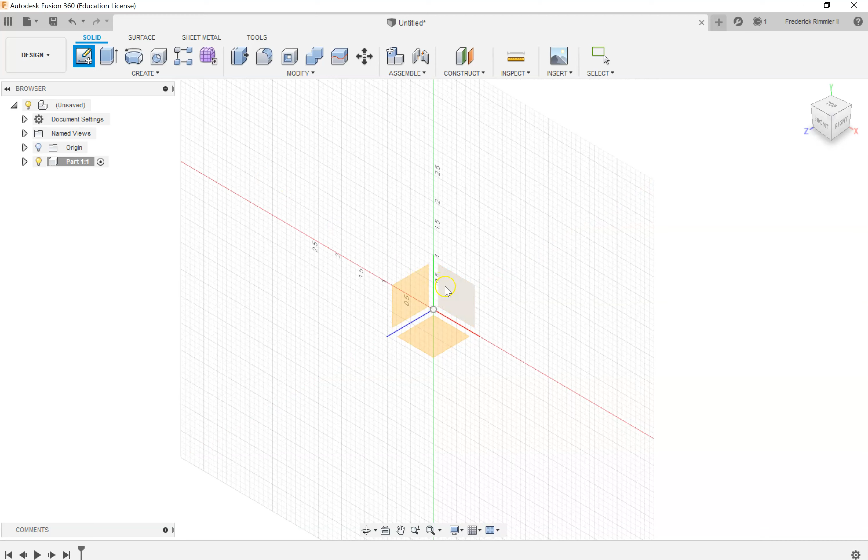Now remember, every 3D model has to start with a two-dimensional sketch. So I'm going to come up here and click Create Sketch and just pick a surface to create the sketch on. It doesn't really matter at this point which one we use.

And so for part 1, we've got a couple different tools to choose from: line, rectangle, circle. I'm going to go ahead and go with line and just quickly draw out this shape. We don't need to be too concerned with size or anything like that at this point.

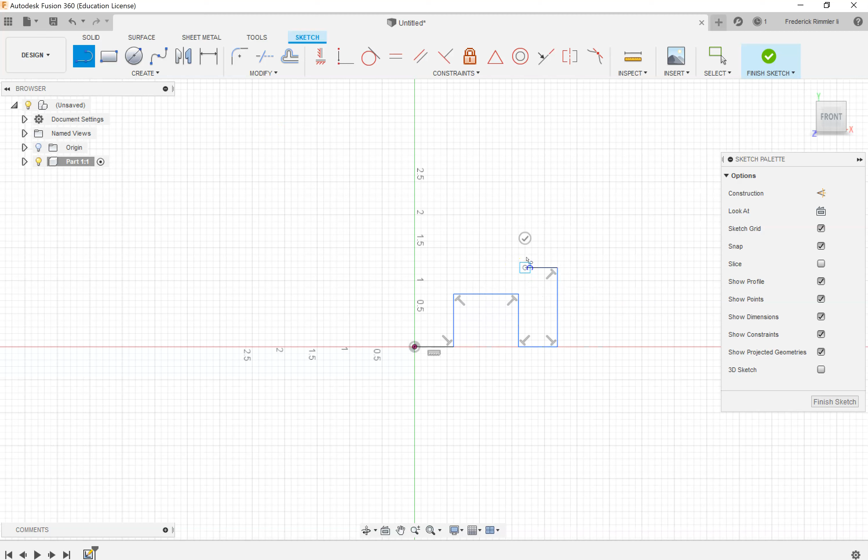I'm going to take a little more time than I did yesterday in class and get some nice straight right angles. Oh, looks like I missed there just at the end. So I'm going to come up here to my perpendicular constraint and go ahead, click two lines to make that a nice even right angle.

Another important thing you want to do is always start at the origin when you make a new sketch for the first time. Because remember, everything needs both size and location. If you start at the origin right here in the middle, that will lock your location in.

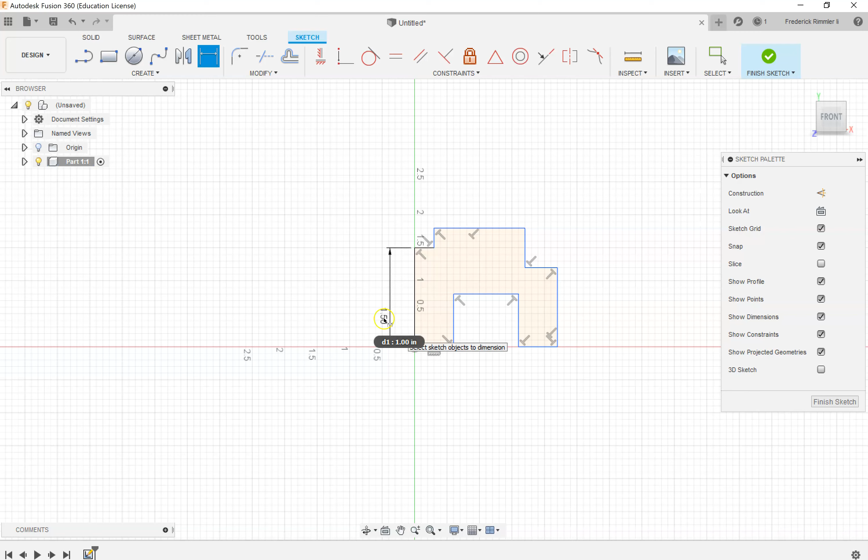So now I'm going to come up here and click Sketch Dimension and add some measurements to this guy. So we know that he's 1.5 inches tall. This guy right here is 1 inch, 0.5. And I'm not going to narrate all of these measurements.

I'm going to go through a little bit quickly because all of these measurements can be found on the worksheet. You're just going to have to pull them off of that isometric sketch.

Now, if I want to dimension across this whole guy, I'll just go ahead and click one corner, click another corner, and then I can bring my mouse down and add my overall width.

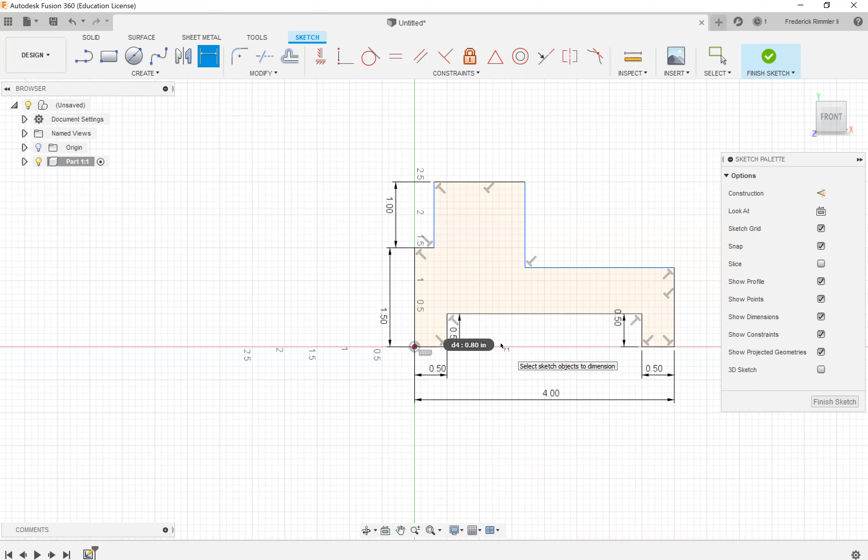You can see it got a little funky there. That's fine. All I'm going to do is keep working on adding those dimensions, and eventually, once we get them all done, it'll go ahead and take shape.

The other thing we want to do is, you can see we've still got some blue lines here. Ultimately, by the end, all of those blue lines will turn black, like you see here. That means this part is now fully constrained.

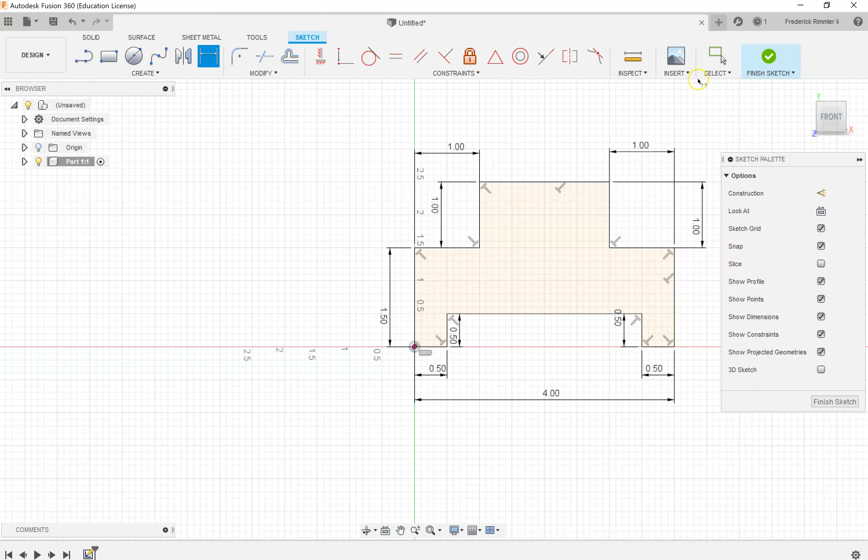I can go ahead and click Finish Sketch up top, and it's time to make him 3D. We've got two options. We can either click Extrude and type in our size, or we can go ahead and

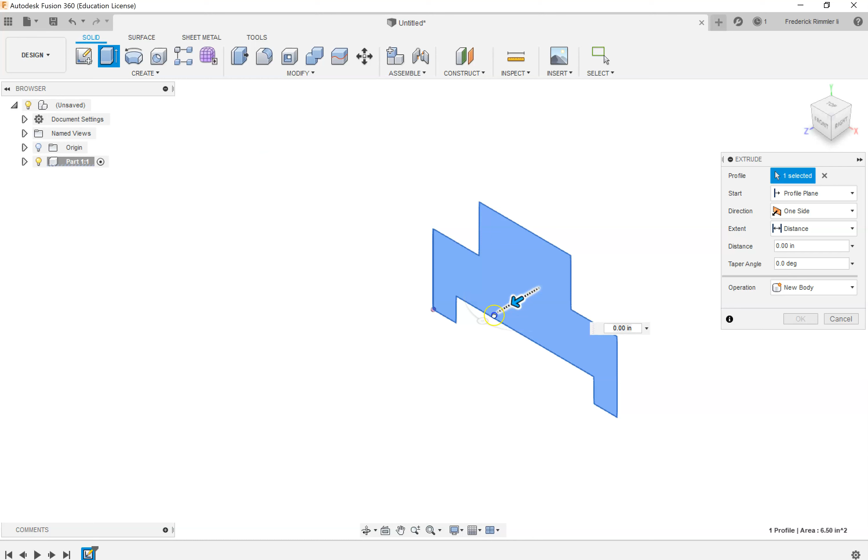use the Press Pull tool under Modify, click our shape, and drag him into 3 dimensions. Now I'm going to go ahead and add the depth of this guy.

Next up, we need to add a little shelf right here on the side. So I'm going to click Create Sketch and click this side.

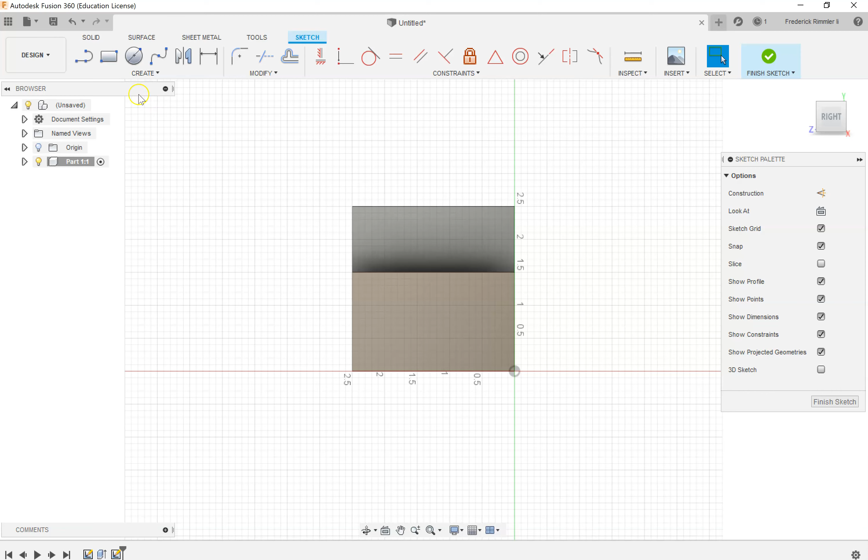Let's see, looking at that shelf, he's a rectangle that is 0.25 inches tall, 1.5 inches wide. So I'm going to go ahead, draw a quick little rectangle and make him 0.25 by 1.5 inches. You can see he's still blue, and that's because every feature has to have both size and location.

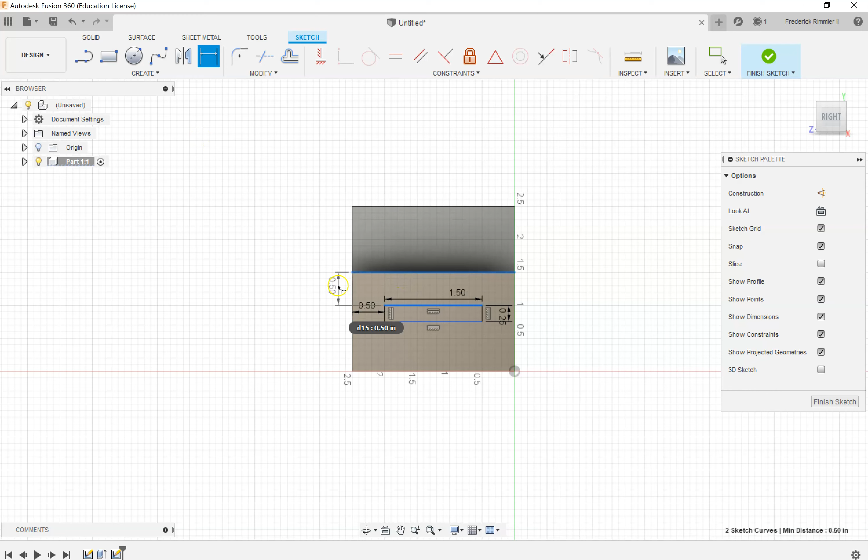We've got our size added, but we don't have our location indicated. Looking at that isometric sketch, I can see that the distance from the shelf to the front is 0.5 inches, and the distance from the shelf to this edge, that looks like it's going to be 0.75 inches.

Our sketch turned black. That means he's fully constrained. We're good to go ahead and finish the sketch. And again, I'm going to use the press pull tool.

Click there and drag him out. It looks like 0.75 inches. And that's it, part 1 is done. I'm going to go ahead up here and save it as practice part 1.

Now your worksheet also says in your notebook to record the following information: surface area, mass, volume, and center of mass. If you come over here to your browser and right-click on the component, you can come down to Properties, and then all of that information is right here. We can see our surface area, mass, volume, and down here our center of mass in the X, Y, and Z direction. So you'll want to go ahead and record that information in your notebook.

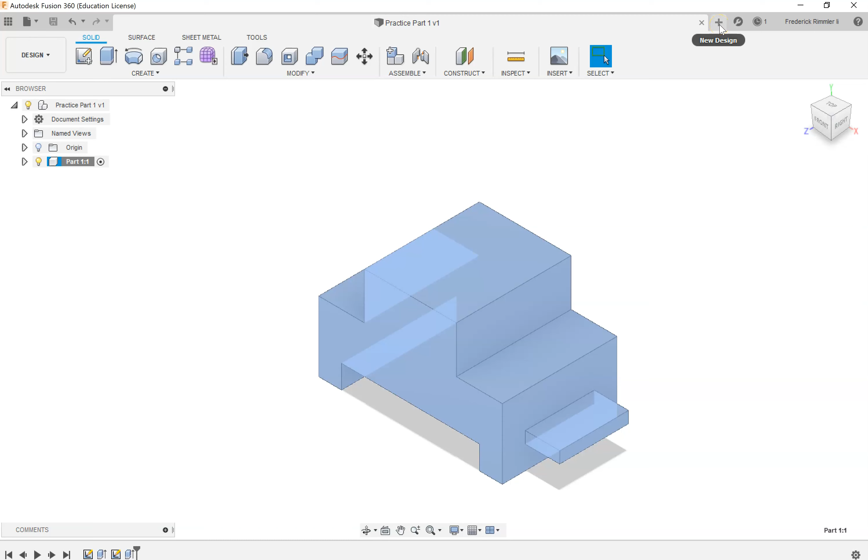On to part 2. To make a new part, I'm just going to come up here and click the plus for a new design. If my screen looks a little different than yours, that's because I'm working on my laptop and I've customized some of the settings.

Now, looking at part 2, there's a very important note down in the bottom where it says all dimensions are in millimeters, so we're working with a metric part. I'm going to come here to my browser and go to Document Settings, and where it says Units, I'll click that icon. Then I can come over here on the right side and change inches into millimeters. Click OK, and now we're good to create our component.

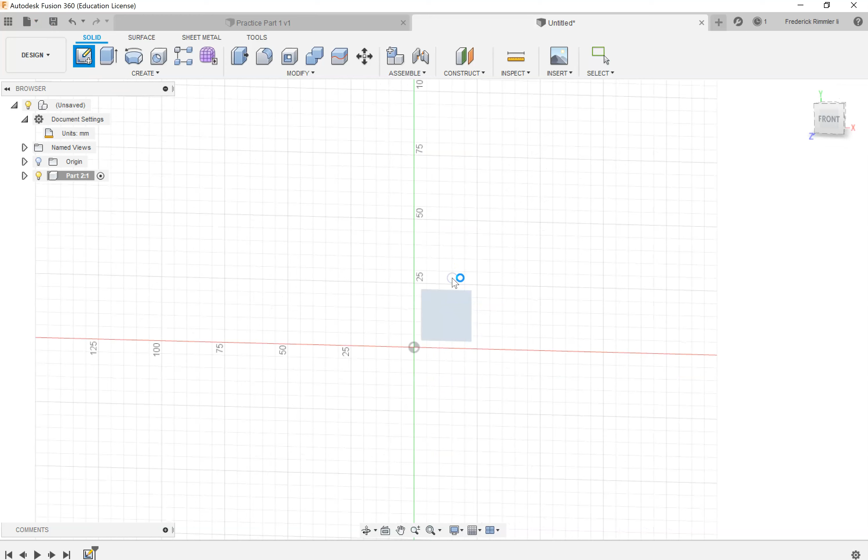Create new component, I'm going to call this guy part 2. And just like before, everything is going to start with a sketch. So I'm going to create a sketch and draw him out. I'm going to use the line tool again, starting in my origin, and just draw out my rough shape nice and quick.

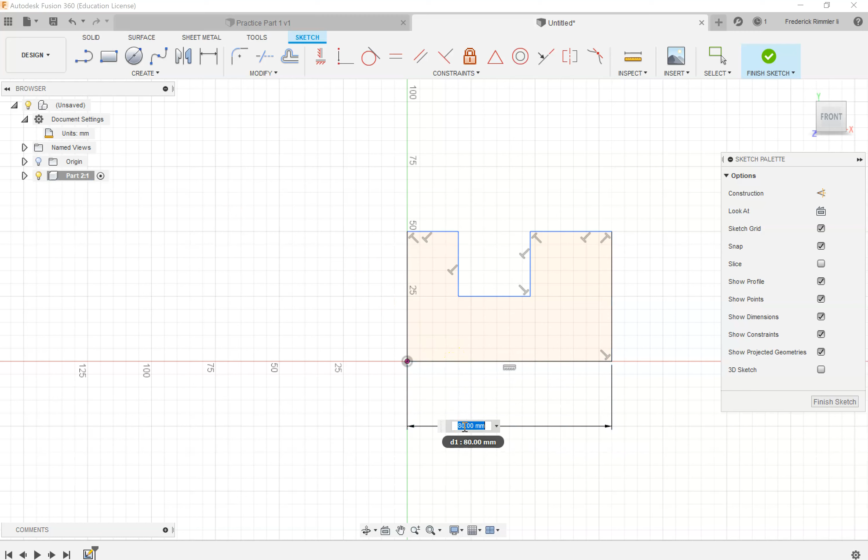Now it's time to set some dimensions. I can see that my overall width is 60 millimeters, and my overall height from top to bottom is 40 millimeters. Then I'm going to go through and fill in these measurements from here. Again, I'm not going to narrate all of these measurements. You're going to want to practice pulling some of these measurements from the isometric sketch on the worksheet.

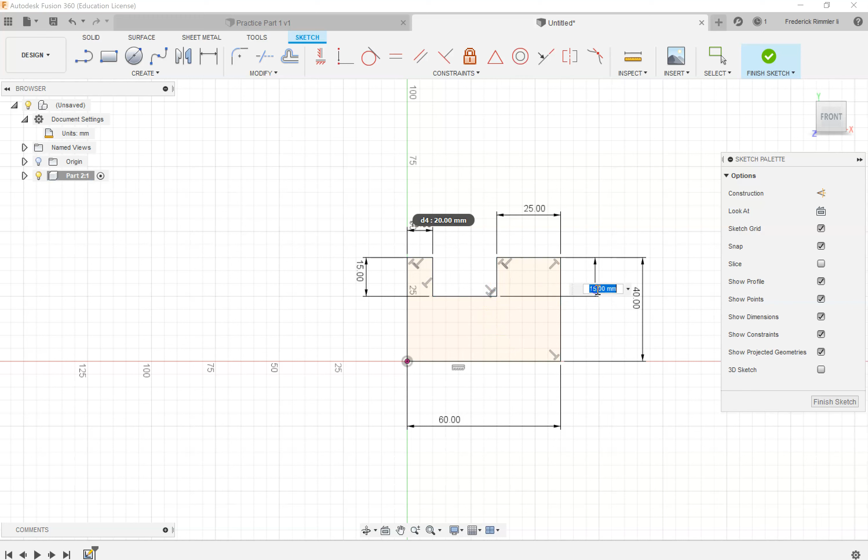Going through, it looks like we are almost fully constrained. And there we go, all of our lines are now black. We are now fully constrained. I can finish the sketch and use the press pull tool to drag him into 3 dimensions. Looks like a depth of 30 millimeters.

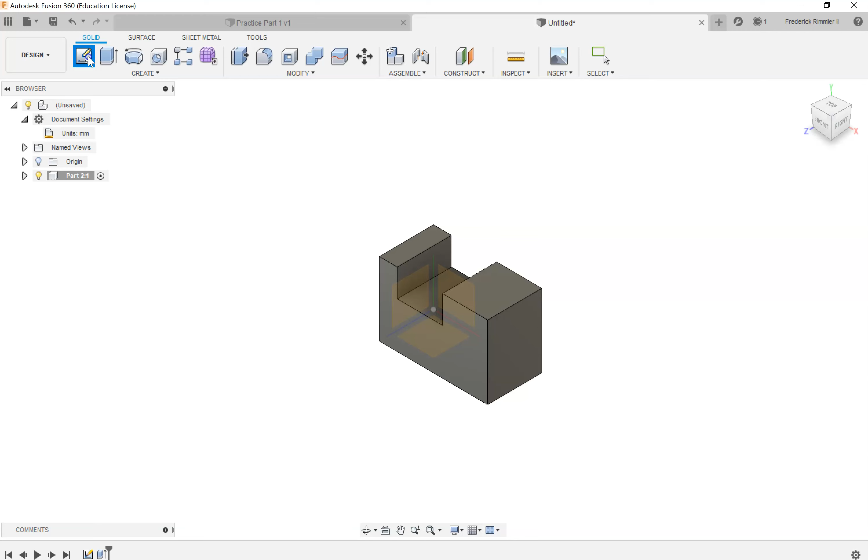Now, this guy, instead of having a shelf on the side, he's got a hole running through, but we actually make it the exact same way. I'm going to come up top to Create Sketch, click on that side where I want to put the hole, and use the rectangle tool to draw a quick rectangle.

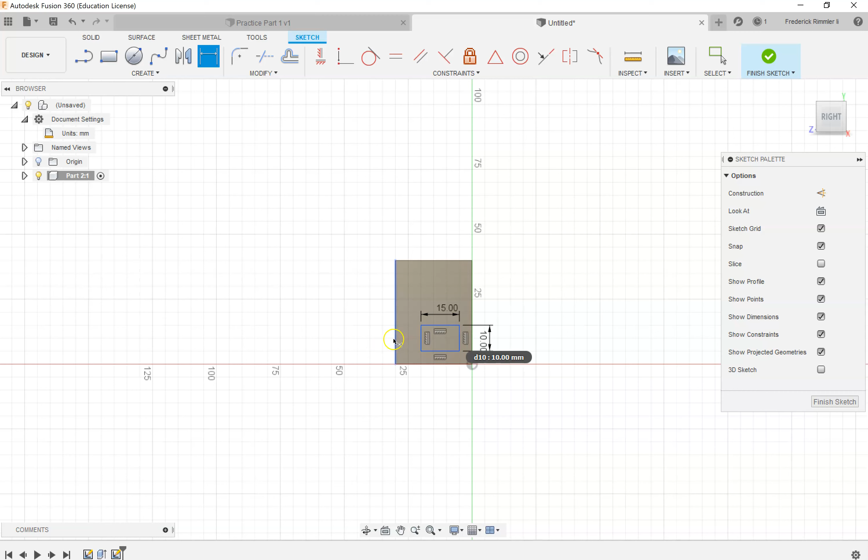My dimensions for this guy, he looks like he's 15 millimeters wide, 10 millimeters tall, and he's still blue because I still need to give him a location. So looking on our sketch, from the front of the part to the edge of the hole is 3 millimeters, and from the bottom of the part to the bottom of the hole, looks like he's 5 millimeters.

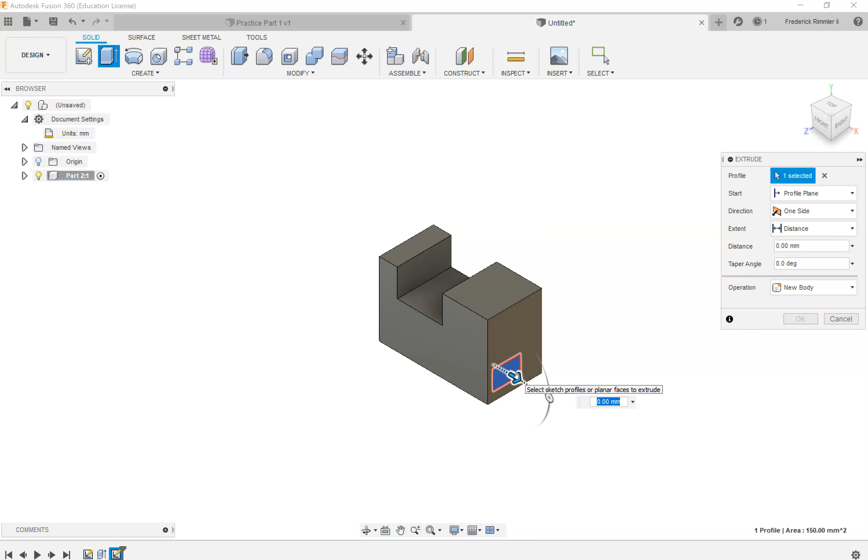All of our lines are black, we're fully constrained. I'm good to finish sketch and use my press pull tool. Now I'll click on that rectangle, and last time we dragged him forward. This time I'm going to drag him backwards into the part. You can see our distance is now negative, and the part lights up red, indicating that it's going to be cutting a hole out of the material.

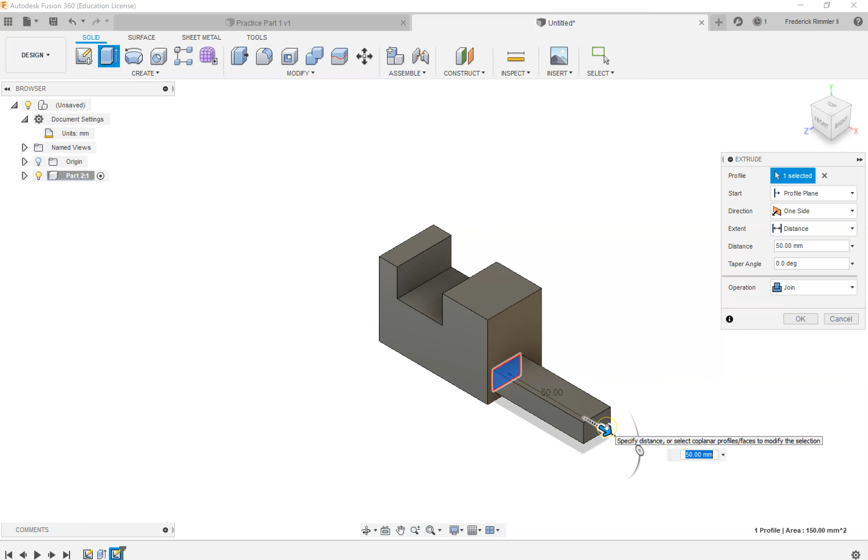We can also, on this right side, see Operation Cut. When I'm pulling him forward, the operation is listed as join. Those are the two basic types of operations that we do. Join means we're adding material, cut means we are removing material. There's a couple other tricky ones that we'll get to down the road, but join and cut are the two basics, and you can really accomplish most things using those.

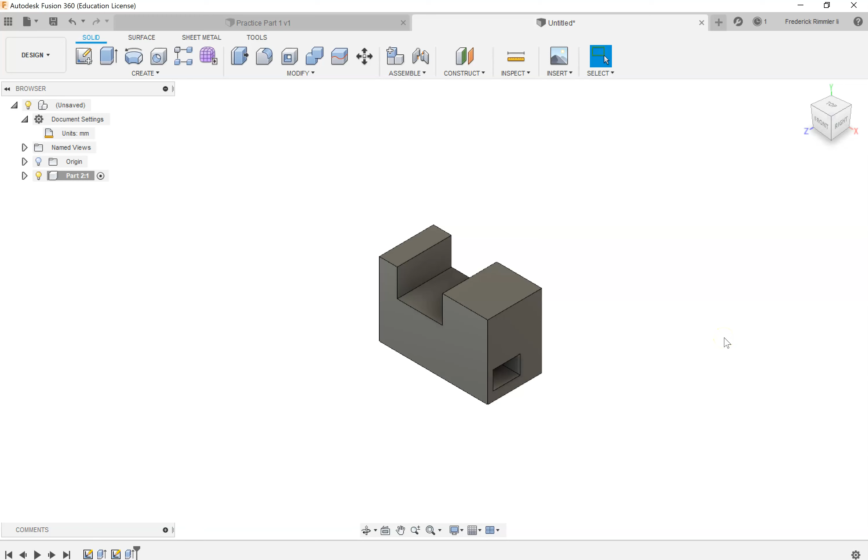And like you can see, our part's now done. I can go over here to the browser, right-click, open my properties, and record my surface area, mass, volume, and center of mass. I'm going to go ahead and save this part as practice part 2.

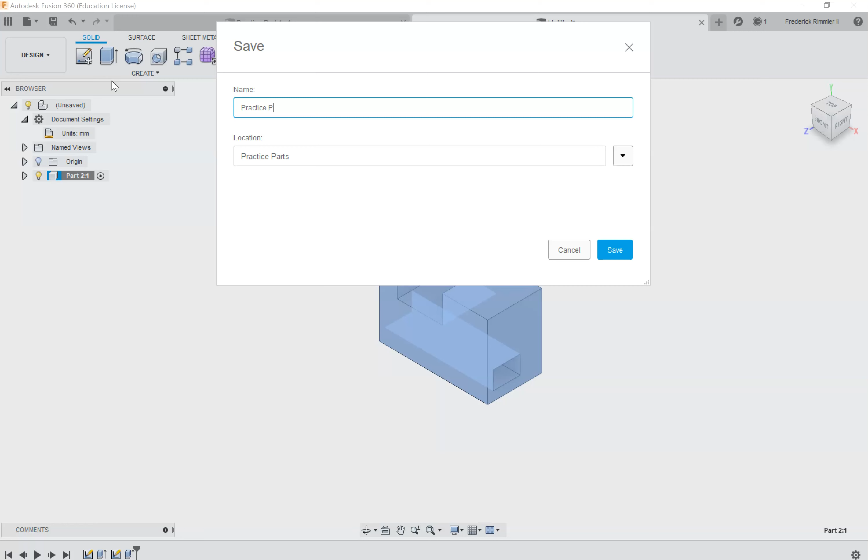Moving on to my third part. But before that, if I open up the data panel where we had that project, we can see all of the parts we're saving into this project, along with the times they were created. A handy feature is we can access different versions.

I can see that practice part 1 was last updated 5 minutes ago by me, and that's when it was created. As we work on more complicated parts and go through version 1, version 2, version 3, sometimes taking a step backwards to look at past versions can be useful if we make changes we don't necessarily like. So I'll close the data panel and move on to part number 3.

Looking at our note on the bottom, it says all dimensions are in inches. I'm going to double check right here in my browser that we are in inches. Create a new component, call this guy part 3, and go ahead and start my sketch.

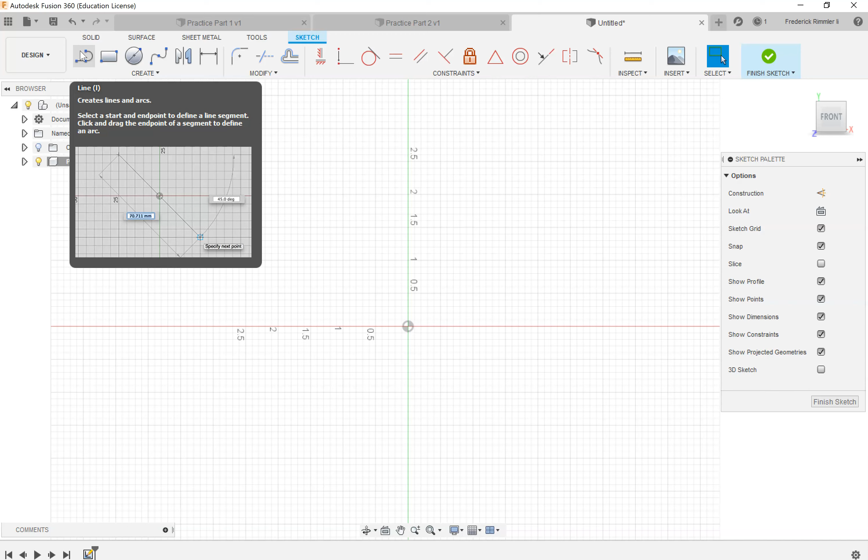Now there's a couple different approaches we could take from this guy. We could draw him from the bottom and build up, draw him from the front, or draw him from the side. I think I'm going to just draw him from the side.

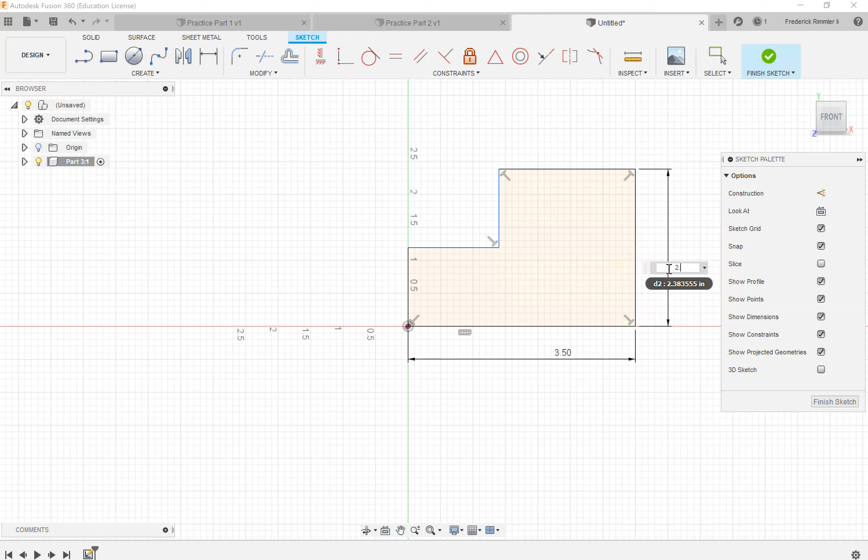So I'm going to start with this L shape right here, and then add some dimensions to him. Let's see what we got: 3.5 inches wide, 2.5 inches tall. This top little shelf here is 1 inch, and the height of these front legs is 1 inch as well.

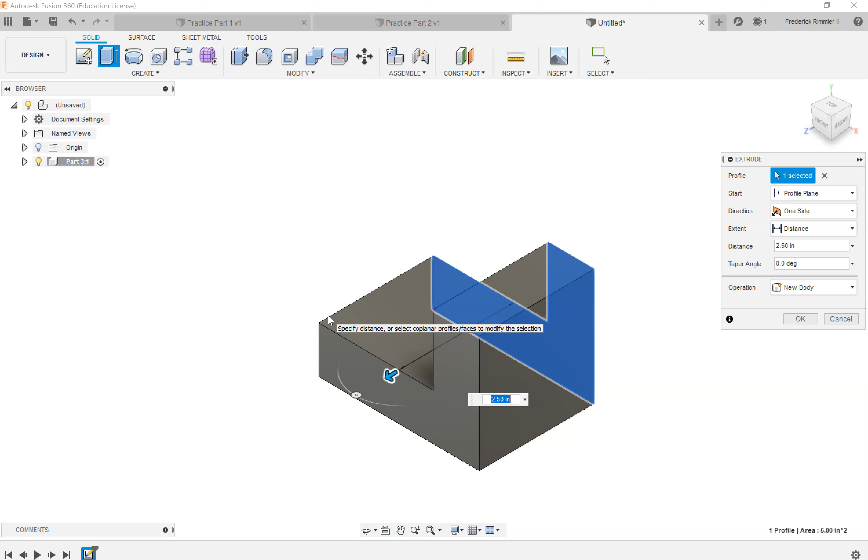Finish, and now I'm going to use my press pull tool to build him into 3 dimensions. Now the overall dimension is not listed here, but I can do some math and determine that the overall dimension is 2.5 inches.

Now it looks like we need to make 2 cuts, 1 on the top and 1 on the front. So I'm going to start with my top cut. I'll click Create Sketch and click the top.

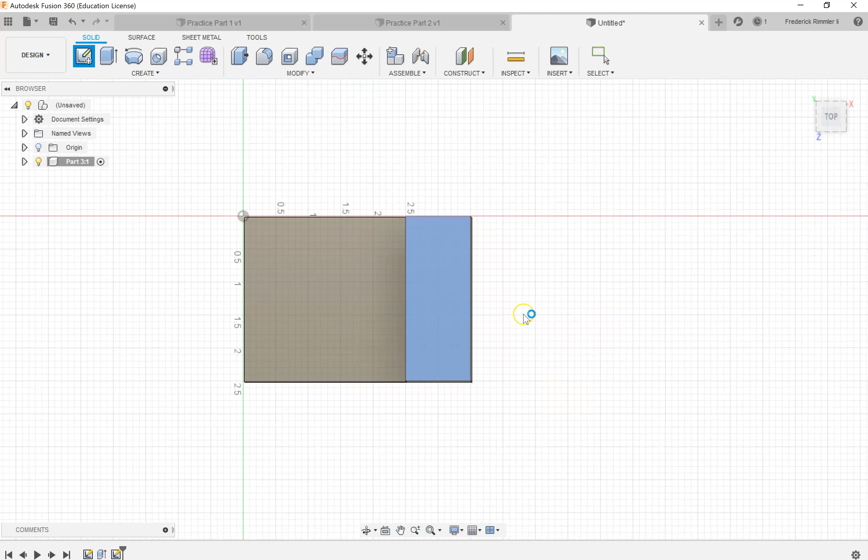Now I'm going to draw a rectangle from right here to right here. You'll notice that when I drew that rectangle, it goes from the little plus sign to the X when I went onto the edge, and that's going to line that rectangle up right on the edge. We really like that.

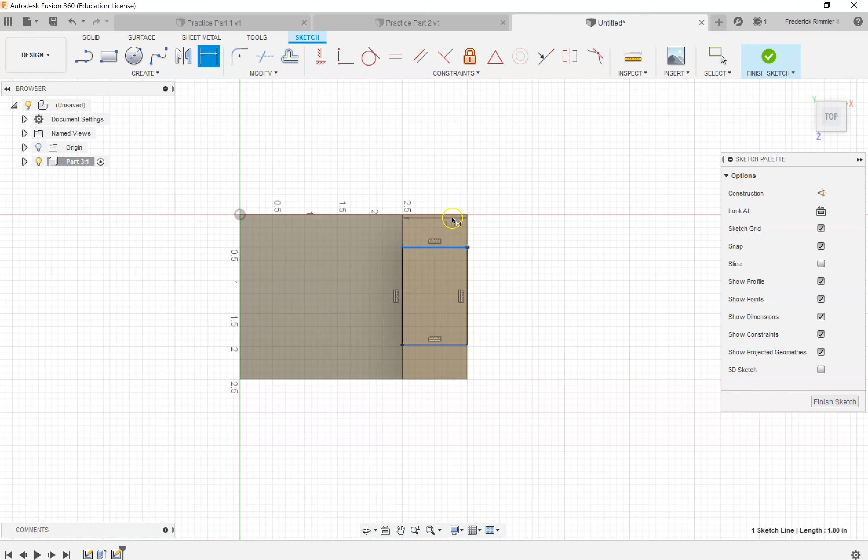So I can add some dimensions. From here to here is 1/2 inch, and from here to here is 1/2 inch. Because we got those 2 X's, my left and right side are already lined up with the edges of the top of that part.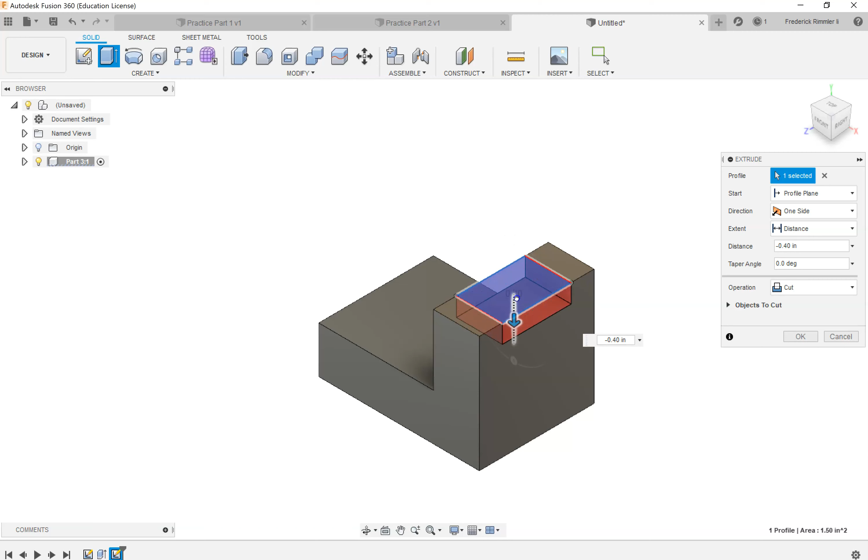Finish, press pull. Now I'm going to click that cut, drag him down, and bring him down -0.4 inches. I'll come up here to my view cube, swing around to my front by clicking one of the corners, and now it's time to add the second cut.

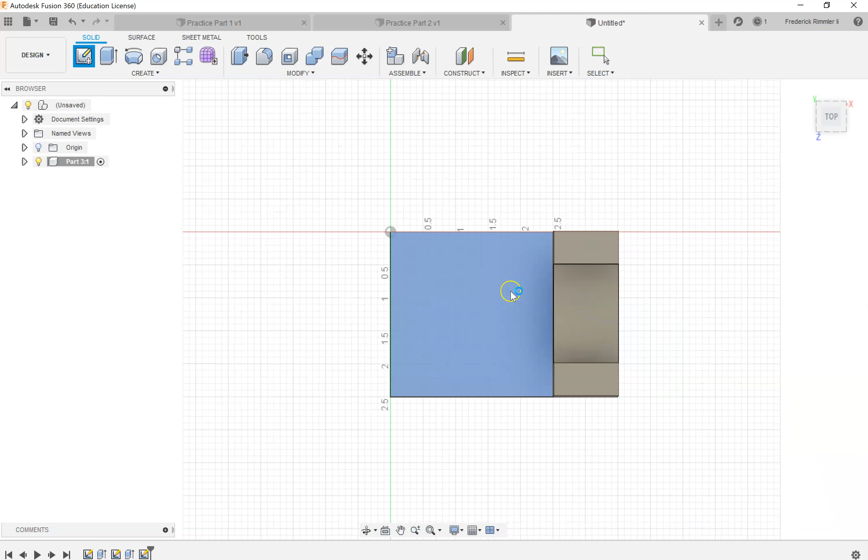I'm going to come right here, start a new sketch, and draw a new rectangle, getting that X right on the side there.

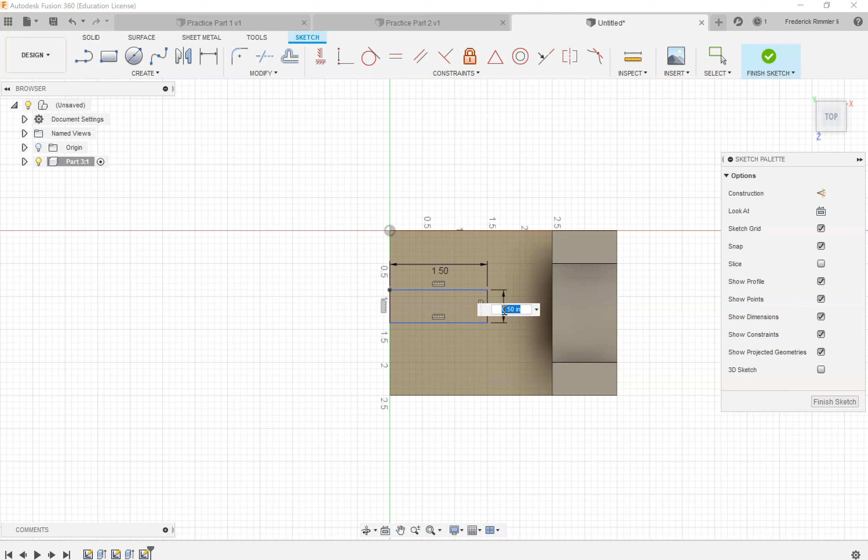Let's take a look at this rectangle. His depth is 1.5 inches, he's got a width of 0.5, and he's located 1 inch from the side of the part.

All of our lines are black, which means we're fully constrained and good to go. I'm going to finish, press pull.

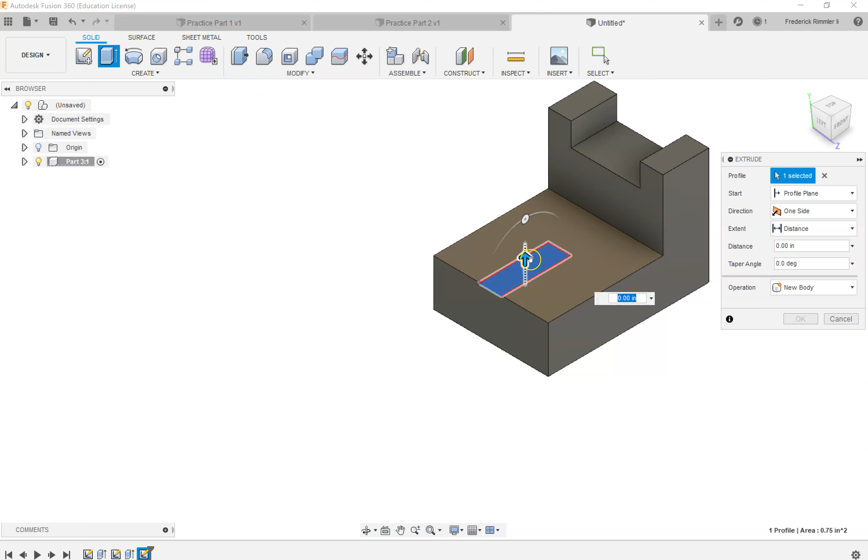Then I'm just going to click that shape, and I'm going to drag him all the way through because we want that cut to go all the way through.

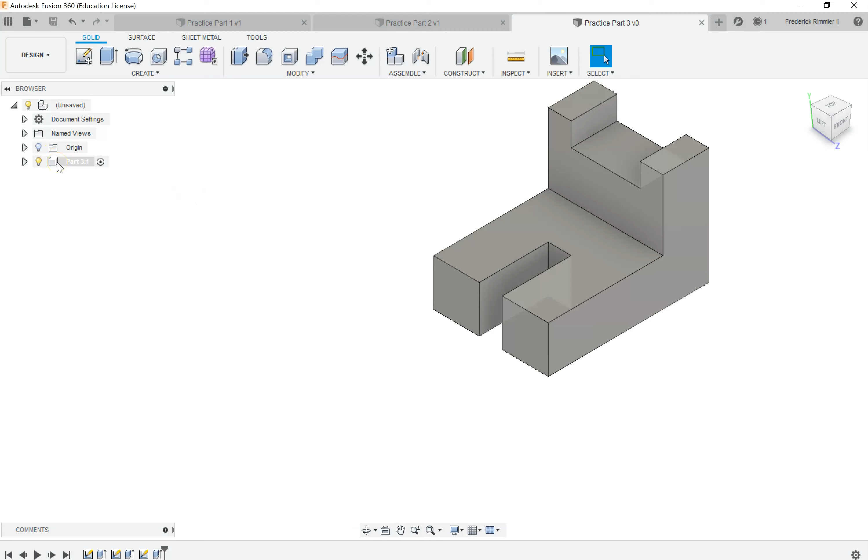And now we're done. Come up here to save, name it practice part 3, and click save. I can come over here to my browser, right click, and view my properties to get that surface area, mass, volume, and center of mass.